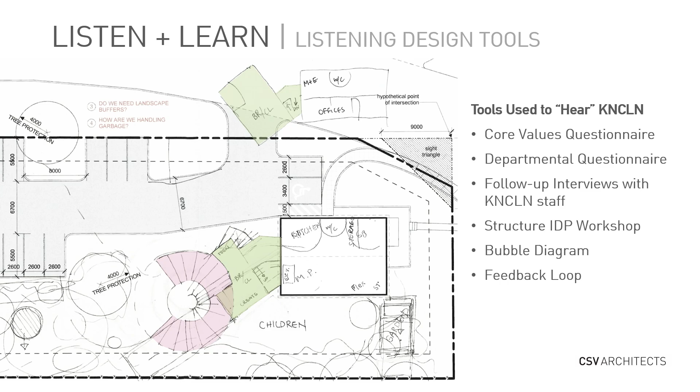Moving into bubble diagrams and schematic square bubbles as we go through, we refine and iterate, and we get those feedback loops working. That's really the last thing - the feedback loops really do design through those design phases, and are key to the communication so you can come to a successful completion of the project.

I think we're going to hand it over to Camille to speak about heritage.

So I'm going to be talking a little bit about the existing conditions and all the characteristics of the building when we actually found it and came to site and visited for the first time.

To give a little historical context: in 1854, the Grand Trunk Railway was brought to northern Kingston. Because of the railway and the growing community, area residents petitioned the local school board to build a school. Out of immediate need, they used an old freight shed, so as you can imagine, the conditions were not great.

The building that currently stands on our site was built as their permanent solution. It was designed by architect John Power as the Frontenac School, erected in a very prominent position at the corner of Montreal and Railway Streets between 1872 and 73.

It was renamed the Depot School in 1896, and the City of Kingston purchased the property in 1970 upon the closure of the school. The building became known as the Depot School Daycare Center for many years until the Social Housing Office took residence, prior to KNCLN calling it their home.

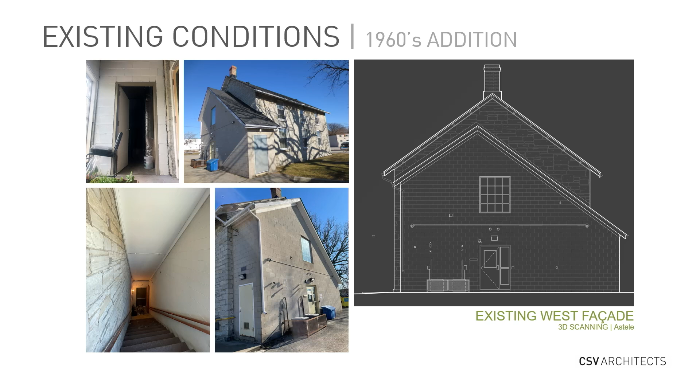Unfortunately, the interior heritage building was long stripped of the original character-defining elements, and no historic photos could be found to provide insight into what the original school interior would have been.

As mentioned before, the building does not contain thermal insulation, and the perimeter walls were built up with lath and plaster, a combination of wood and metal framing, and gypsum board. During previous site investigations, asbestos was found in the perimeter wall assemblies and ceiling and floor finishes. Additionally, lead paint was found on window and door frames and walls. So that's another layer of abatement and remediation that we need to deal with in the project design.

So the existing ground floor ceilings were acoustic ceiling tile dropped lower than the head of the original heritage windows. So it really created kind of awkward geometries around the perimeter walls and made the space feel heavy and darker than it really is or originally would have been.

The second floor space was a little bit improved. The ceilings were much higher, finished with gypsum board, and they were really following the slope of the attic above. So there was one interior staircase providing access between the floors, and then the exit stair in the addition that we'd mentioned earlier.

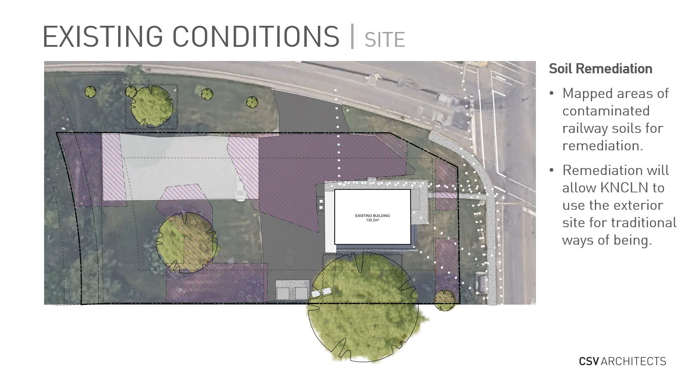So the site was quite sparse, with the exception of 3 mature trees, a gravel parking lot, and a large paved asphalt area adjacent to the building. So it really was a blank canvas to allow us to think sky's the limit of how we really wanted the site to be designed, just to maximize the programming and everything they wish and hope the site could be.

So now we're just going to move along to some functional program. I'm going to pass it to Brandon for the next couple slides to talk about how you currently use the space. Yes, okay, wonderful.

So as Camille said, yeah, we've used every inch of that space to the point where we started thinking about bunk bed desks, and they're not safe.

So the new space, when we started talking and we're even in the listening phase, I think one of the things I'll go on a tangent on is that we actually felt heard, which I feel is often enough. We say we need to listen, but to actually hear the client and to hear an Indigenous voice in this time was something that was, I think, unfortunately odd, but something that was really happy that happened here.

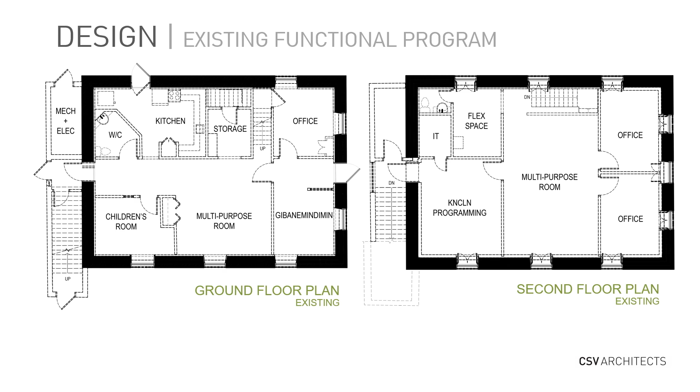So the space is tiny. We've had to chop it up to fit offices. We have multi-purpose rooms. We use every inch we possibly can, but like we said, there's some significant challenges there.

Next slide please. Some things we haven't been able to use in the space is we haven't been able to host fire. We haven't been able to garden directly into the land. And so these opportunities coming up are very exciting.

And one of the things we're also quite excited for is an increased space for our sharing center, our Adeya - there's an Anishinaabe word there, which my Anishinaabe is quite bad, so I won't try. But a space for folks to come and gather the supplies that they need to survive. Montreal Street and Railway, that space is quite a challenging space within the city, and sees instances of poverty and shelter use around the area. And so KNCLN has had the opportunity to support people with that sharing center.

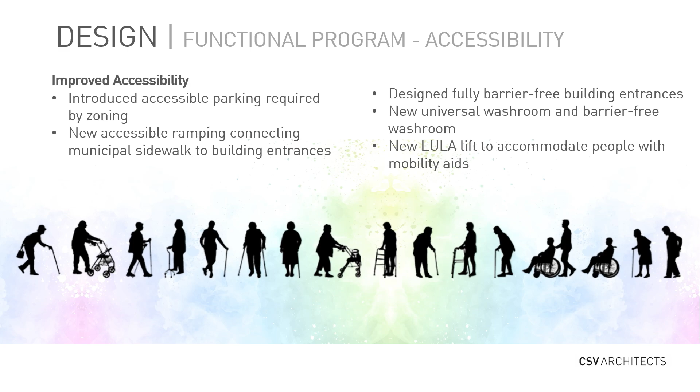So now I'm going to, actually Daryl and I will share this one here. Okay. Just give me a moment here. Can you hear me? Yep. Okay, okay.

As Brandon and Camille just went over all of the outdoor amenities, I think what really drove through the functional program, the workshops, and the design phases was all that feedback that helped us come up with our design solution. As we pored over all the different elements that were mentioned and discussed, the one idea that really resonated was that the space should be beautiful and intentional. We found this quote from architect David Adjaye, and we really feel it captures the approach we took and KNCLN's desires for the space.

Buildings are deeply emotive structures which form our psyche. People think they are just things we maneuver through, but the makeup of a person is influenced by the nature of spaces. So we really like that quote.

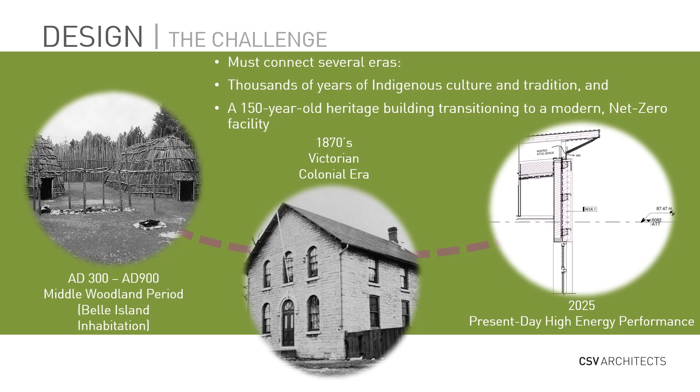So the nest, as we like to refer to it, serves many Indigenous communities. One of the conversations we had with Brandon throughout the design process was that they really felt a design leaning towards widespread common symbolisms rather than specific Indigenous iconography was key. Our approach was through a meaningful selection of wood species, a ceremonial fire circle and circular settings for ceremonies, learning, and teaching, and a focus on nature and a naturalized site with abundant trees, winding stone pathways, wildflowers, and tall grasses.

So we made design decisions and material selections that made connections between the heritage characteristics and representation of multiple Indigenous cultures in modern design. Really our key drivers were biophilic materials, and the circular and organic forms, to provide a visual and spatial distinction from the rectilinear heritage building while speaking to the cultural values shared across some of those Indigenous peoples.

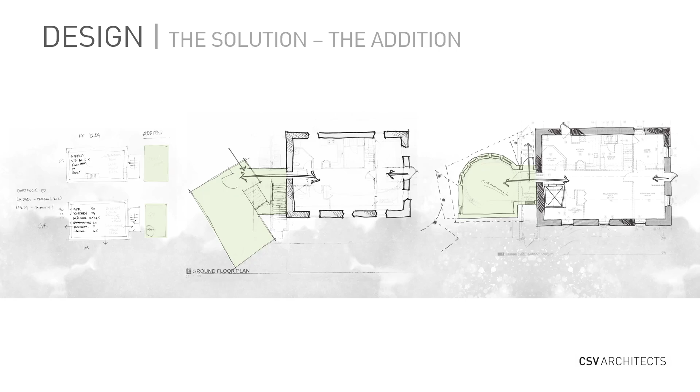So we started the concept design of the new addition, which was bound to 45 square meters to meet the GICB grant requirements. Basically the new addition couldn't be larger than 30% of the footprint of the existing building, which was already quite small. In total, it brought our gross floor area to 350 square meters.

We first began with a few design iterations with a rectilinear addition with similar proportions to the heritage building. But through the design workshop process and those feedback loops, KNCLN asked us to explore circular spaces to reflect the importance of circular structures in ceremonies, gatherings, and interactions. This design shift was really welcomed by us because it prompted echoing, sweeping curved design elements in the fire circle canopy and the site layout.

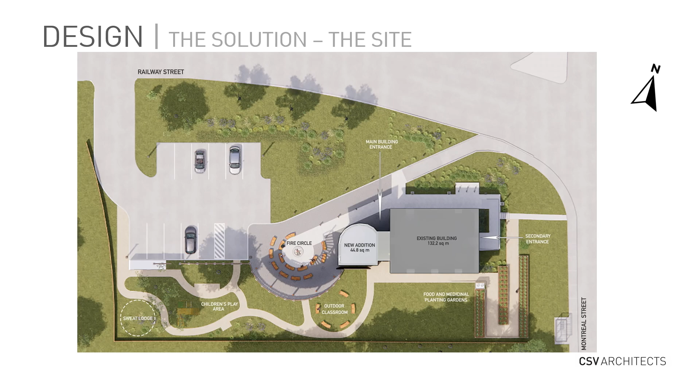As you can see, the main focal point on the site is the fire circle. It is aligned right outside of the building on axis. We've got the hard and soft landscaping, including the winding path that leads from the fire circle to the children's area. We've noted the location for the sweat lodge, the future outdoor classroom was fit in there, and then the gardens on the right-hand side for the planting of traditional medicines.

Just going to add one thing we forgot to mention. If you're wondering how that angle came about, bisecting the site — when speaking with KNCLN, they like to enter fire circles from the east. So that eastern access to enter the fire circles is really driving the angular direction on the site. Ignore the north arrow, it's not right.

We did actually include some fencing. It was mostly open, but with cedar material fencing around the children's area for safety.

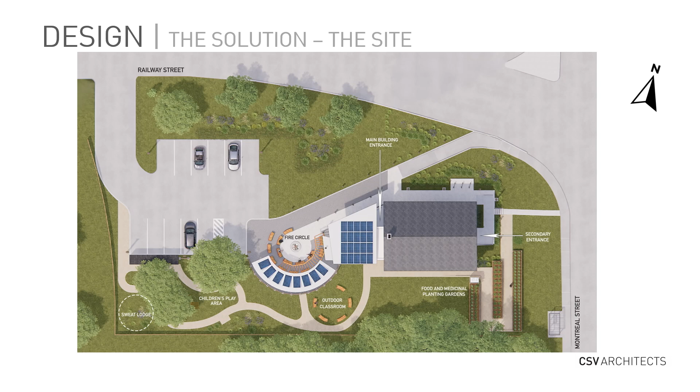So we add the roof structure to the plan. You can see that the fire circle canopy and the addition each have PV panels on it. I'll talk a little bit more about that in more detail. Then as we get into some renderings, we're going to walk around the building.

We're just starting construction, so renderings we'll have to do for today.

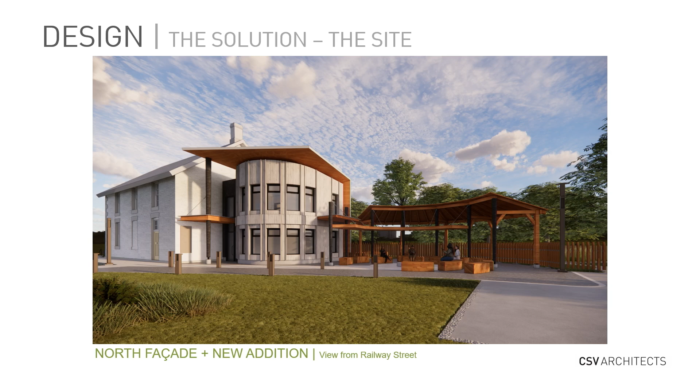You can kind of see the building's new entrance is clad in black wood siding to really give it a differentiation and a separation. So that's the main entrance, but it shows that there's a separation between the two structures.

For the addition itself, we chose gray wood cladding. It's a weathered gray spruce fir. Again, that materiality we find complements the stone, but also still remains kind of subordinate to the stone as the main structure.

But then that's contrasted with the brighter cedar tones underneath the soffit, under the entrance canopy in the fire circle curved timber canopy. We've also created some benches around the fire circle, and you can see the low cedar fences for the children's area in the back.

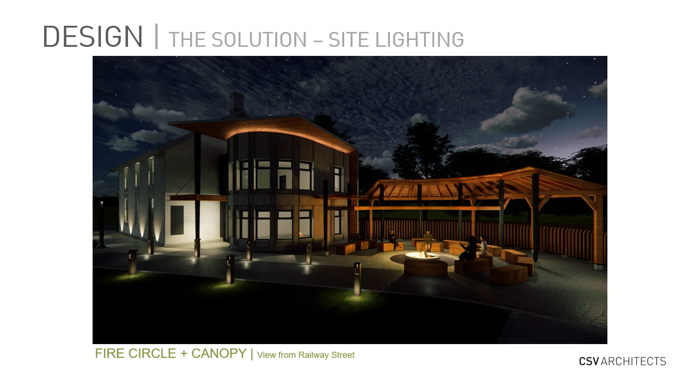We do have some grazing light on the heritage facade itself, and we've also added some other kind of accent lighting, including around the curved top of the addition to kind of highlight the curvature itself, but then also lighten up the feel of the canopy. And again, we tried to downplay the fixtures themselves and really have the building and the shapes be the star of the show and play against the heritage facades.

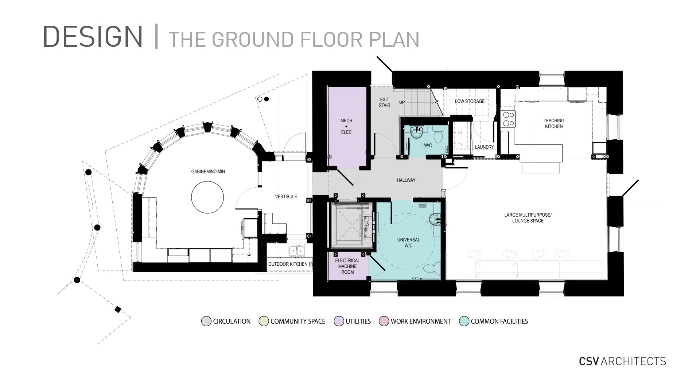To the right, as you enter the heritage structure through an existing opening through the mass masonry wall, the first zone contains utility areas, the new Lula lift, access to the new exit stair, universal washroom and unisex washrooms. And really this zone acts kind of as a circulation, back of house area, also as a buffer to the noise or activity happening in the neighboring areas.

So a glazed door provides a threshold to the hub of the ground floor functional program. An opening teaching kitchen overlooks the large multi-purpose space and lounge. The teaching kitchen is really meant to provide traditional cultural and everyday modern cooking skills to KNCLN's clientele. The kitchen and lounge area are really designed to support each other's functions, where food preparing during the classes can be shared among other program groups.

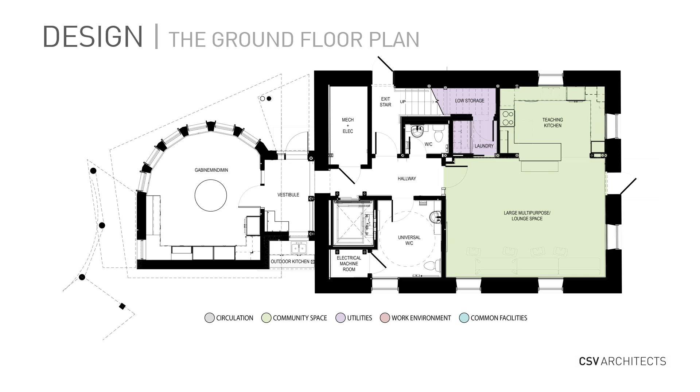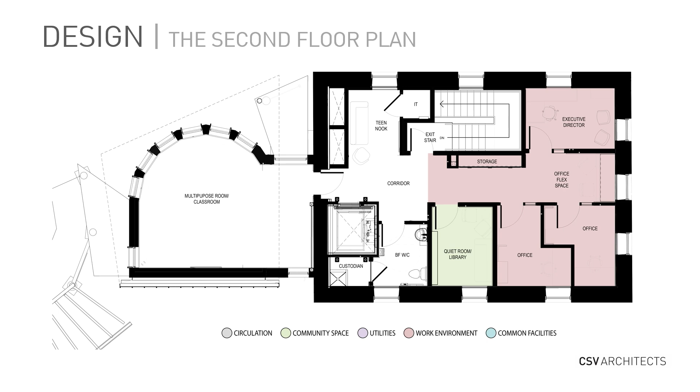So to the east, we have offices for the executive director and staff grouped to one side, with a flex space for volunteers nestled at one end of the corridor, centered on the feature arched window. A quiet room and library are immediately adjacent, and this room kind of doubles as an acoustically private space where sensitive meetings can be held with clientele.

So our interior concept design was really inspired by the Canadian landscapes and by the sage plant.

So the primary goal was to use this inspiration to unite the sense of history and place with elements holding importance to both Indigenous cultures and heritage materiality. So now I'm going to start to go through why we've made some of those selections and how we've been able to tie them to both.

So first, heritage paint colors were selected that speak to the natural elements of earth, air, water, and wood, to act as a complementary canvas for vibrant Indigenous artwork and cultural display items.

Sage, as a sacred plant, is a medicine traditionally used for purification and cleansing in the act of smudging. The plant contains varying beautiful shades of soft greens, creamy whites, and mauves, so these tones were included in the selected heritage paint colors.

And finally, biophilic materials found in the surrounding nature, namely local wood species with indigenous cultural significance such as spruce, fir, birch, pine, and cedar, were selected. Many of these local woods would have been used in the 1873 construction of the original stone schoolhouse.

Interior finishes were also carefully chosen to bridge that gap between heritage conservation and the sensibilities of Indigenous cultures. New birch hardwood floors will be present throughout the space. We know hardwood is not really the first choice for modern public buildings, but we felt it was really appropriate in this case.

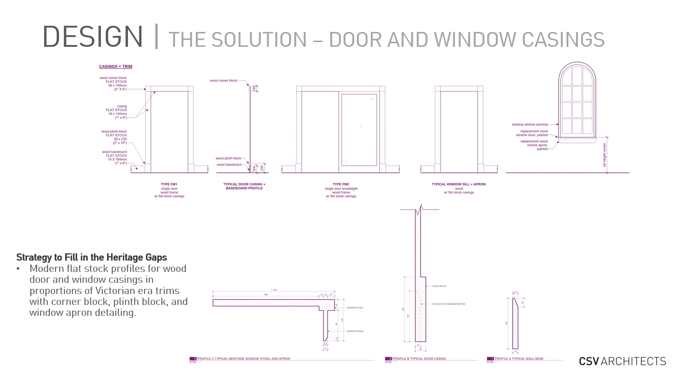So the heritage time period of the building is acknowledged in a general fashion with clearly distinguishable new fabric, without the potential of introducing erroneous replications.

It's believed that the existing plastic laminate windowsills and aprons included in a previous interior fit-up attempted a similar approach, yet with an incongruous material. Similar profiles will be recreated in dressed and painted pine.

This first concept rendering shows the ground floor multi-purpose room and teaching kitchen, which illustrates some of these design strategies used to align the Indigenous representation with the heritage fabric that I just mentioned.

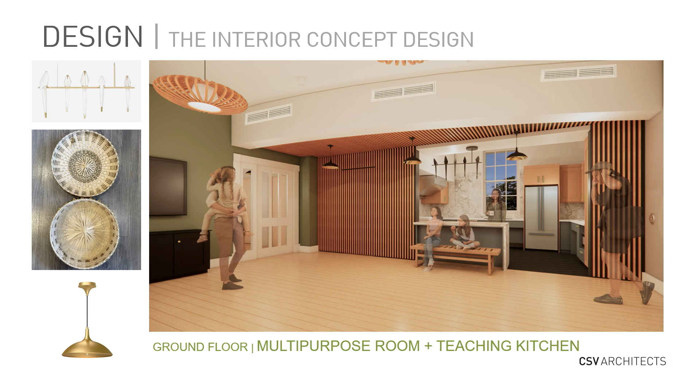Again, here you can see those birch floors and cedar slat fixtures. A unique light fixture with birds perched on a branch hangs over the kitchen peninsula. This light fixture was something that KNCLN immediately responded to, because birds carry language in some Indigenous cultures. Feature light fixtures were chosen that were fabricated from curved segments of wood reminiscent of traditional basket weaving.

In the background there, you can kind of see the glazed six-panel heritage wood doors that echo some of those entrance doors still in the building, but with modern profiles.

The overall design of the addition is a modern approach with materiality sympathetic to the heritage structure. This rendering shows the expanded Gabineminimin housed in the new addition with built-in storage. This room will be flooded with natural daylight, giving the space a light and airy atmosphere.

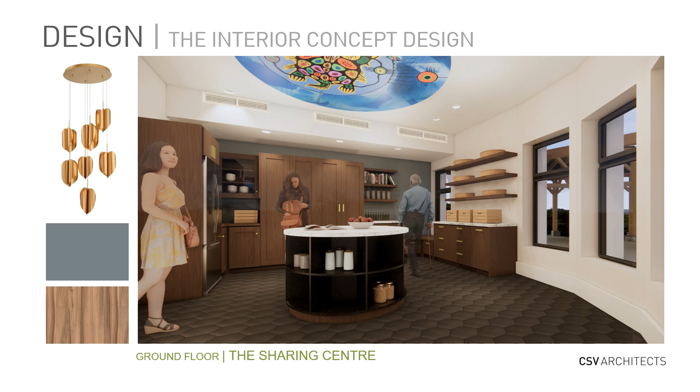The curved facade is echoed in the round counter-height island, fit with cubbies for display and storage of stocked items. A circular ceiling feature will be used to showcase Indigenous artwork, and from this hangs a metal chandelier formed of leaf-like petals. Warm natural wood tones have been selected for the millwork and open shelving.

This final interior rendering highlights the second floor classroom in the addition. Panoramic glazing provides abundant views to the new site design and all its natural elements. At the interface with the existing building, the heritage limestone facade remains exposed, juxtaposed with new heavy timber structural members.

The curved facade of the addition is reflected in the circular feature ceiling that is inlaid with timber, oriented to north, south, east, and west, as they would if forming part of a traditional Indigenous medicine wheel. We also have some lunar light pendants that hang from the center of this feature.

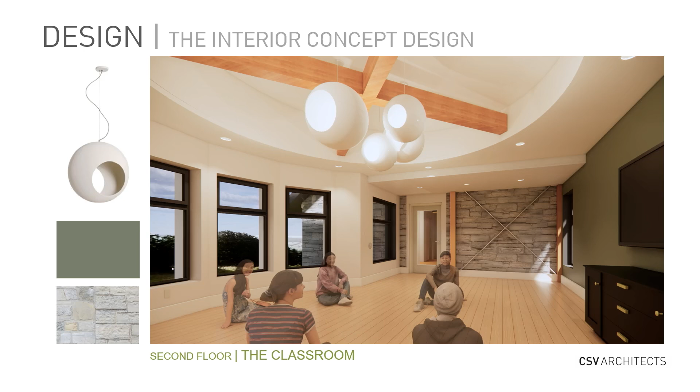Over time, many interventions have been implemented to improve the performance of the original wood windows and exterior doors. On the ground floor, the existing wood window assembly had aluminum storm windows and heritage double hung windows, which had all been sealed shut with 6 millimeters of acrylic sheet screwed in place, completely sealing the window opening so you couldn't open them at all. On the second floor, you still had the aluminum storms, the heritage windows, and interior in-swing wood sill sashes that had been added at some point to increase thermal performance.

Daryl's going to talk about this a little bit more when we get into some of the net zero design.

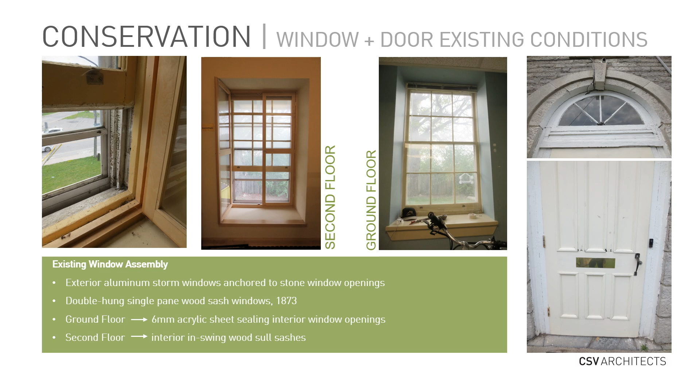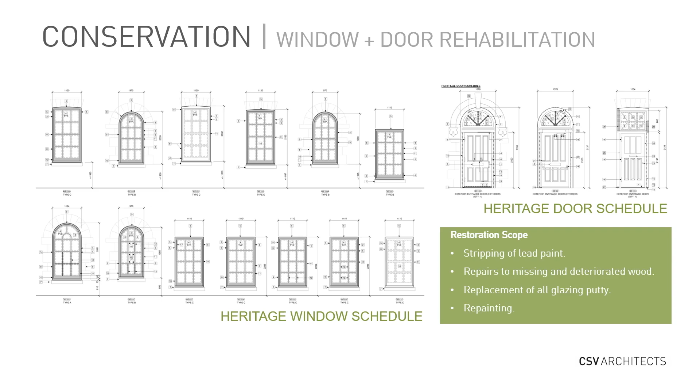This slide shows our process of the heritage rehabilitation of these windows. It's going to be quite extensive, so they're all going to be removed from the building, including stripping of all the lead paint finishes, and replacing missing and rotting wood. The most important thing we'll be doing is replacing all the glazing putty for improved air tightness. We're also adding interior passive house rated tilt and turn wood sill sashes that will contribute toward the net zero energy targets.

Stantec structural conservation engineers formed part of the consultant team and performed an in-depth masonry review to assess the condition of the aged mass masonry walls. We conducted additional site investigations, arranging to dig test pits at the building's foundations, remove masonry units from the exterior walls, and cut interior exploratory openings to survey the masonry cracking, the condition of mortar joints, and the presence of moisture levels.

This opportunity was also taken to confirm the wall's construction. Basically it's a double wythe wall with rubble core, and it's 650 millimeters thick, so it's pretty substantial what we're working with here.

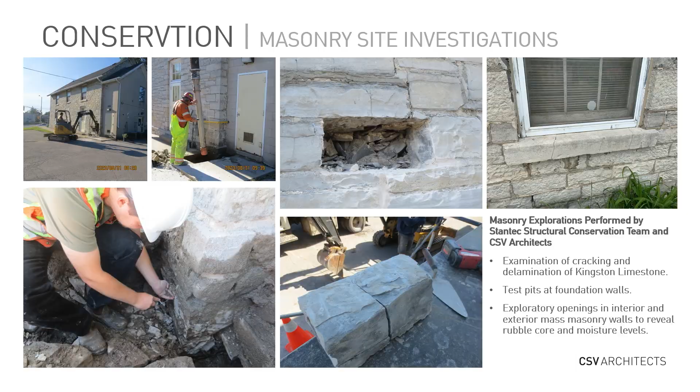The above grade masonry was found to be relatively dry from both sides. However, the limestone was displaying a common defect of Kingston limestone. Throughout the building you can see vertical cracks that occur perpendicular to the bedding planes. These cracks become points of air and moisture infiltration and are concerning if they grow to moderate width, where they invite freeze-thaw damage.

Many incompatible modern cementitious mortar fixes were implemented over time. These cementitious mortars really promoted further stone deterioration by trapping moisture within the walls.

CSV joined Stantec's structural team on site for these additional site investigations, as did LHC Consulting, our archaeology team, who reviewed these test pits for artifacts of historical and cultural significance. We actually didn't find anything in the test pits, so we were able to move on to the next phase.

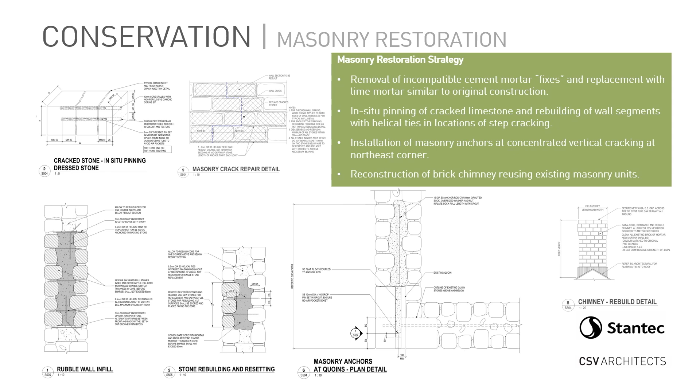Here I've included some of Stantec's detailing, but really one of the major approaches to restoring the masonry is repointing, dismantling and reconstructing the leaning chimney, replicating it with the existing materials, cataloging all the materials that were removed, and repairing step cracking to the corners of the building that were quite severe, along with in situ pinning of some of the dressed stone. With this, I'm going to pass it on to Daryl, who's going to talk about our net zero energy approach.

Repointing of the stone is probably a really good segue. Just going to get myself lined up here.

When you're looking at a net zero strategy for a heritage building, or any project really, we always start with the envelope. In particular for high performance buildings, that's really key for the heritage or any renovation project. In fact, determining what is really feasible from an economic but also a constructability perspective is often a really challenging balance.

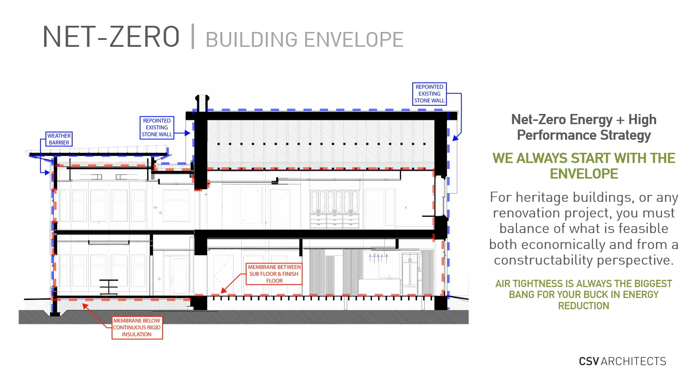Airtightness is really the biggest bang for your buck for initial energy reduction on any project. The heritage stone repairs, in particular on this project, repairs and repointing are contributing to both our weather protection and our air tightness in certain spots of the building. So do not underestimate the value. I know the costs are often quite high, but it's really important, it's critical for protecting the stone from weather infiltration.

Often we combine our air tightness and vapor control in one layer, which we've done in the strategy for the addition. In this section on the slide, we're showing our air tightness line with the red line, and weather protection with the blue. I think when you're looking at the addition, it's pretty straightforward, but one thing I wanted to point out, it ties in with the flooring that Camille was mentioning.

We looked at a lot of ways to try and bring our air tightness in the heritage building, kind of in the crawl space, which is where you'd probably traditionally expect to find it. But it was too costly and not constructible - we were going to have to basically take the whole building apart.

So we've established a solution that puts it above the existing floorboards, but in a sandwich underneath the new flooring that's coming in. So we are definitely going to be watching the installation of that go in carefully to make sure that we get a good air seal at the floor of the heritage building.

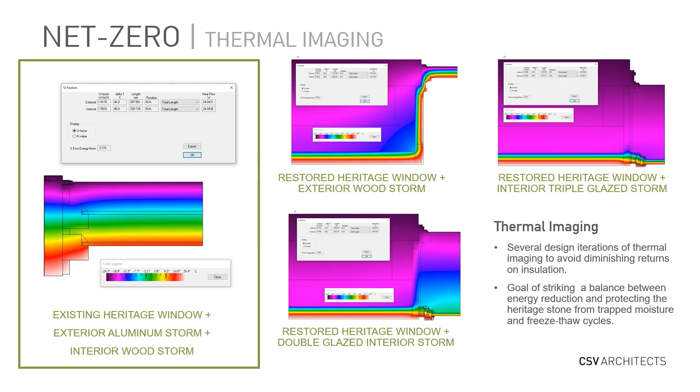So we are really fortunate to have the ability in-house to do these therm models. It really gives us some real-time design assist and helps us come to decisions a lot faster. We can really quickly assess diminishing returns on insulation thicknesses and right size those assemblies for both performance and cost. So that's quite an important thing for us.

You can also see, we're looking at impacts of where the thermal line is with the windows and different ways that's going to affect the project. I'm going to go into a little bit more about the heritage building shortly as well.

And then, as you saw in the therm image, I guess the cat's out of the bag, we were trying to balance all of the investigations, and really we went through a lot of iterations on the window design in the heritage building. We looked at trying to balance air tightness, but also heritage rehabilitation, and budget again comes back into play. We went through looking at anything and everything that we could think of.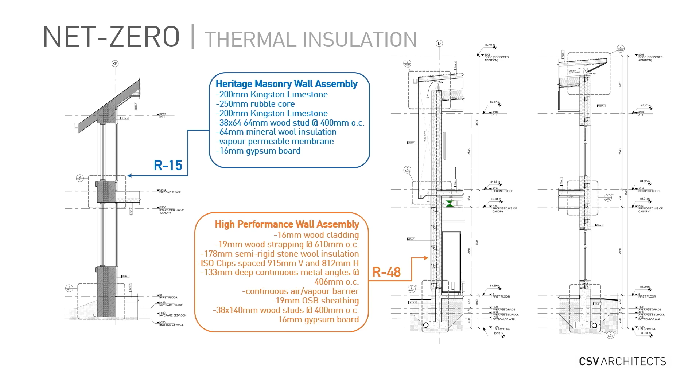We really start to engage with the mechanical and electrical engineering team. I think what's important once you understand what you can do with the envelope is try and find the best fit of a mechanical and electrical system that will then be the most efficient for that given project. There's no silver bullet out there, but we do try to implement by matching the two, a use-less-first kind of approach, pairing mechanical systems with the envelopes that we can achieve. That's important on every project, but really important on a net zero project.

Again, on smaller projects and smaller sites, it's really hard to find space for the PV panel, realistically. And so if you use a lot less energy first and you get your total energy use down, then the PV panels have a fighting chance to hit the targets for net zero.

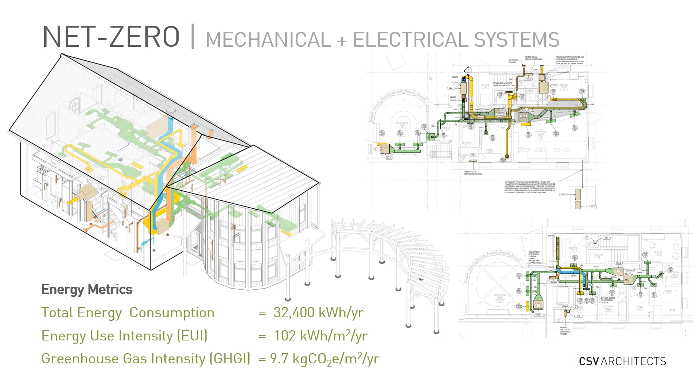For this project, the system we landed on was a dedicated outdoor air ERV for the whole building, combined with heat pump fan coil units delivering heating and cooling, which seemed to be the most effective. There was a lot of coordination with the mechanical and electrical teams to fit everything into this building. It was quite a challenge to get all that equipment in with the limited space we had, plus all the heritage considerations of venting and everything else. But it is an all-electric solution, which also helped Kingston move toward their carbon reduction goals.

If you're interested in the numbers, total energy use is modeled at 32,400 kilowatt hours per year. Our energy use intensity was 102 kilowatt hours per meter squared per year, and our greenhouse gas intensity is 9.7. So we ended up being pretty happy with those numbers.

Now that we have the total energy sorted out, we jumped into the photovoltaic array design. We explored a lot of different options, trying to find anywhere we could put it that would make sense. Some of those were fairly uncomfortable discussions, such as putting PV panels on the heritage roof, which we did not support. Camille wanted me to make sure I said that.

On the slide you'll see some images we pulled out of the PV modeling report. As I said, it's really hard to find enough space at all, but then you run the numbers and it's even harder to find places that actually have good generation on your site. As was mentioned, already in 1937 there was a fairly large tree on the neighbor's property to the south. It's still around, at least 100 years old, with a trunk diameter of 4 feet, so it had a significant impact on the PV efficiency of our site.

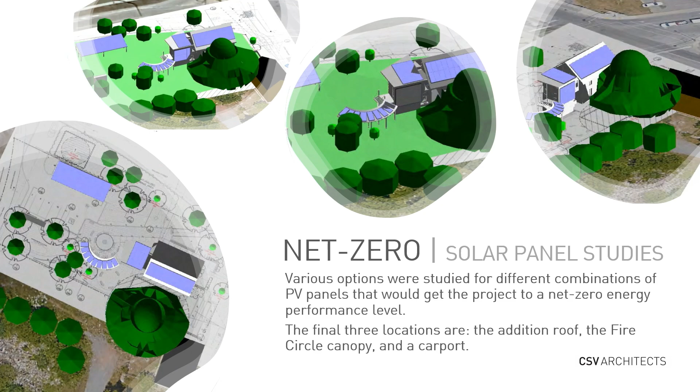If we move to the next slide, of the 5 locations we looked at, not all of them were viable. We looked at some vertical faces on the addition, but those weren't usable due to low yield. The heritage roofs also had very low yields and a lot of heritage concerns, plus we would have had to reinforce the whole roof truss system to carry the new load. So that was off the table, leaving us with 3 locations.

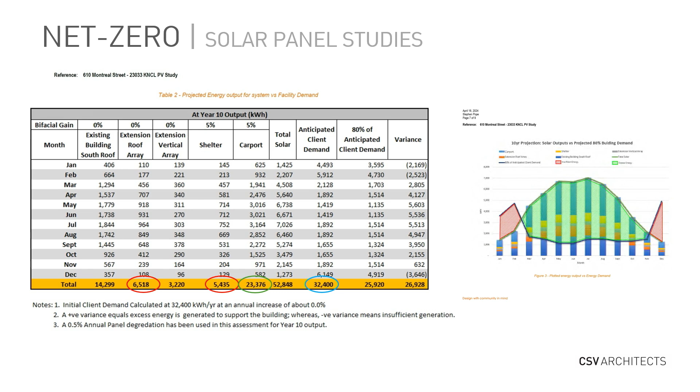These locations are on the addition itself, on the canopy around the fire circle, and on a covered car park area over the parking lot at the north side of the site. As you can see by the numbers, those 3 areas actually put us into net positive territory given the low energy use of the building. However, as we head into construction, you'll notice the current project only includes 2 of the arrays, over the canopy structure and on the addition, which will get us to approximately 90% net zero, not quite the target we were looking at.

However, we have put in all the infrastructure. It's in the design, there's space for it, there's conduits. We're really hoping there's going to be a phase 2, because that location was making up about 60% of the generation, it was the highest yield of the areas. Hopefully the budget will be found and there will be another phase, and we can get this up to net positive. But it'll be easy to do.

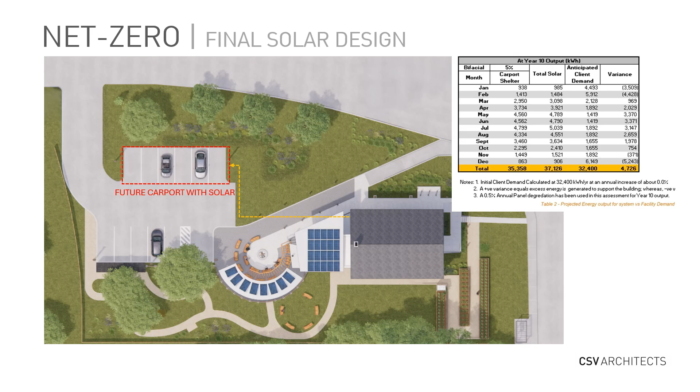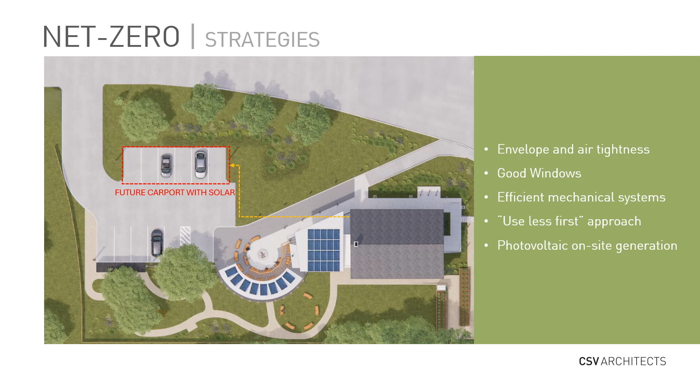So I'll just do a quick recap. The summary for our net zero strategies: we always start with the envelope and air tightness, best bang for your buck, though even on this project we had 2 different approaches for the different structures. Similar for the windows, make sure you have really good windows, and we described the 2 options or strategies we used for this project. Reducing your energy, working really well collaboratively with your mechanical and electrical team, use less first, that's the way to go. And then obviously the photovoltaic on site and the different locations, you have to get them modeled because they're not all going to be as good as the other.

Really, what we're hoping the takeaway is for the net zero design strategy on this project, is that despite renovating a stone building from the 1870s, this project can achieve net positive energy using current known technologies. You just need to have a collaborative approach and design for it.

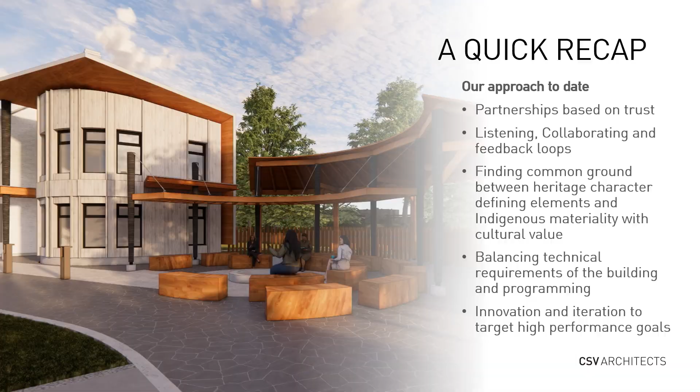Hello, thank you for the presentation. It's a very cool kind of insertion into the city of Kingston, kind of very exciting. I was just wondering, in the context of this, or the expanse of the heritage of the building - we spoke earlier about the heritage of the Indigenous culture on the land, and how far back that spans, how long the original building has lasted. I wonder if you can speak to the life expectancy of the addition with regards to the choice of materials, or if perhaps that was part of the communication or feedback loop to anticipate that this building might last 25, 50 years, unlike the 200-year building, and that maybe that will, as part of the culture, mean to recycle or reinvigorate the addition down the line.

Good question. I think each of us could probably jump in a little bit on that. I can speak to the design of the addition - we always are trying to do durable buildings that will last beyond 50 years at least. But yeah, there is a lot of wood involved in the design, so there are elements that probably could be repaired.